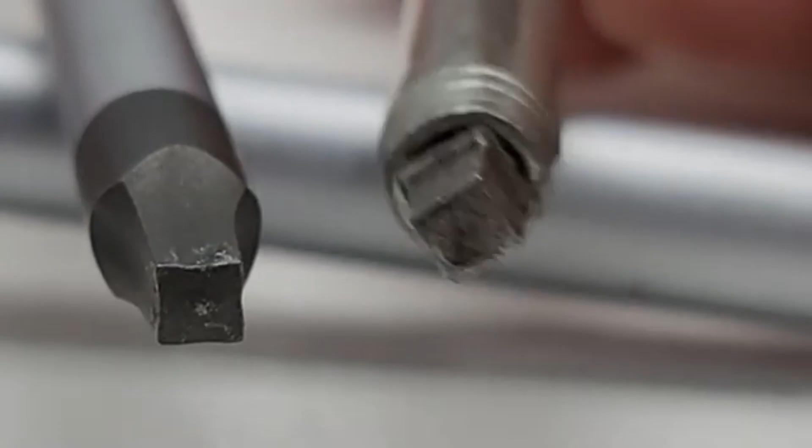In 1913, Henry Ford discovered a tiny piece of Canadian steel that was about to change the speed of global manufacturing. It was a cold-formed, square-drive fastener manufactured in a small brick factory in Milton, Ontario. At the time, Ford was building his automotive empire. Every second on the assembly line cost money.

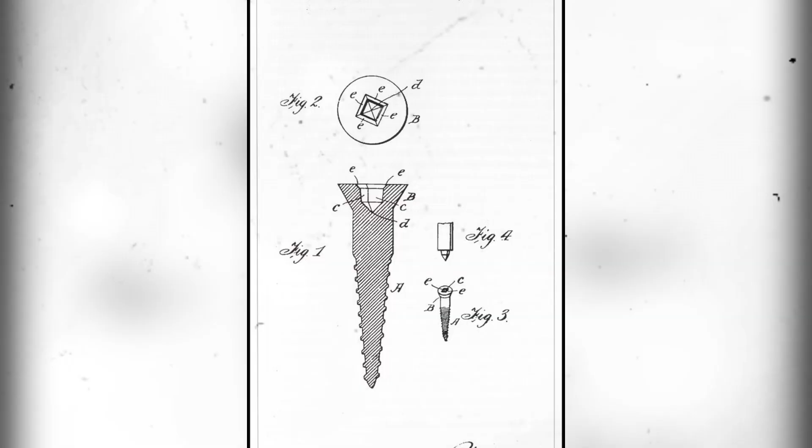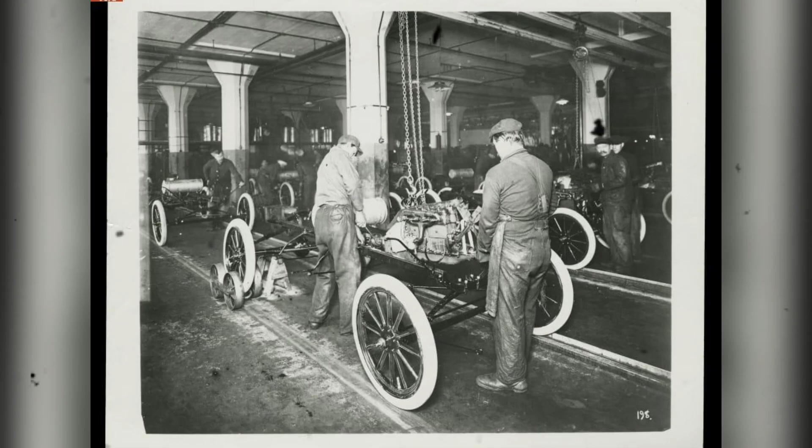When Ford engineers tested this new Canadian screw, they realized the square recess stopped the screwdriver from slipping. It allowed workers to drive screws blind, with one hand, at unprecedented angles. It saved the Ford Motor Company exactly 2 hours of assembly time per vehicle. Ford recognized the mechanical superiority immediately.

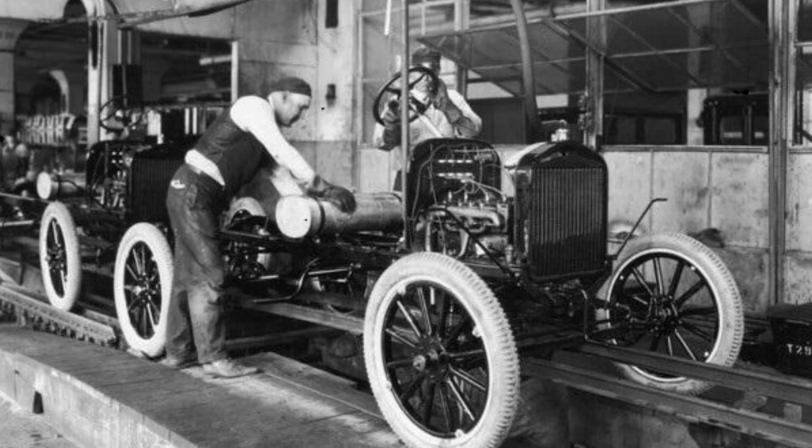He approached the inventor, a former salesman named Peter Lymburner Robertson, with a proposition. Ford wanted the screw. He wanted exclusive rights. He wanted to dictate the manufacturing terms, the licensing, and total control over where the fasteners went.

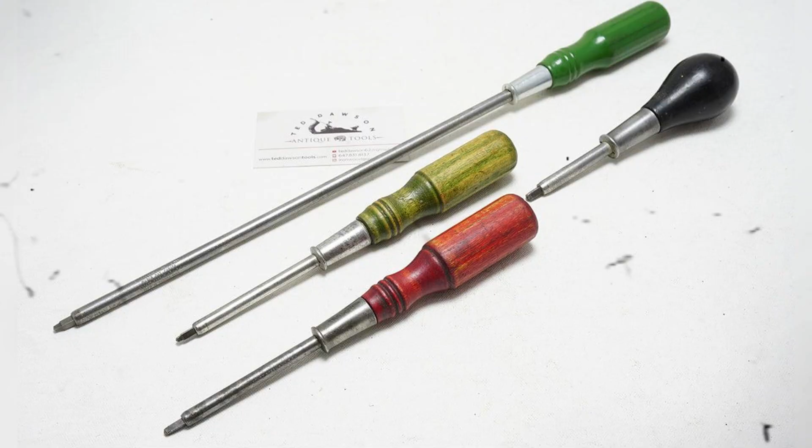Robertson refused. He refused to hand over his patents. He refused to cede control of his Milton factory to American industrial demands. He walked away from the most lucrative manufacturing contract in the history of the early automotive industry. That single refusal fundamentally fractured the North American hardware market. It created a strange, enduring industrial paradox.

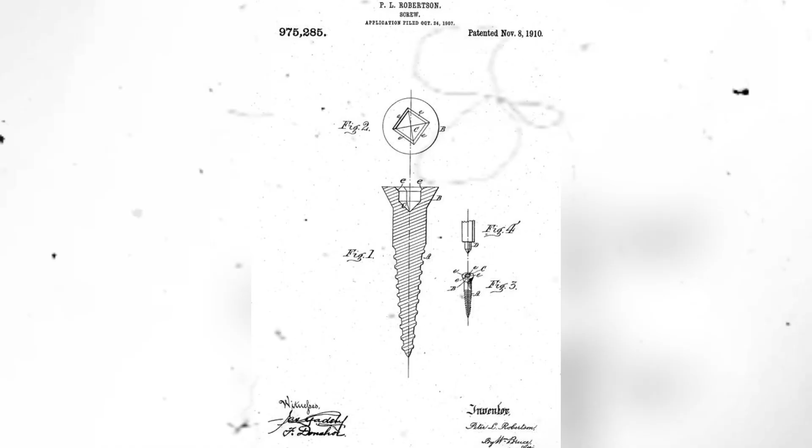To this day, the United States relies heavily on a universally frustrating, cam-out-prone crosshead design. But cross the northern border into Canada, and you will find an entirely different mechanical reality. In Canadian garages, on Canadian construction sites, and inside Canadian manufacturing plants, the Robertson square drive screw achieved absolute dominance. It became the unofficial fastener of an entire nation.

But the cost of that national dominance was international obscurity and the eventual dismantling of the very factory that brought it into existence.

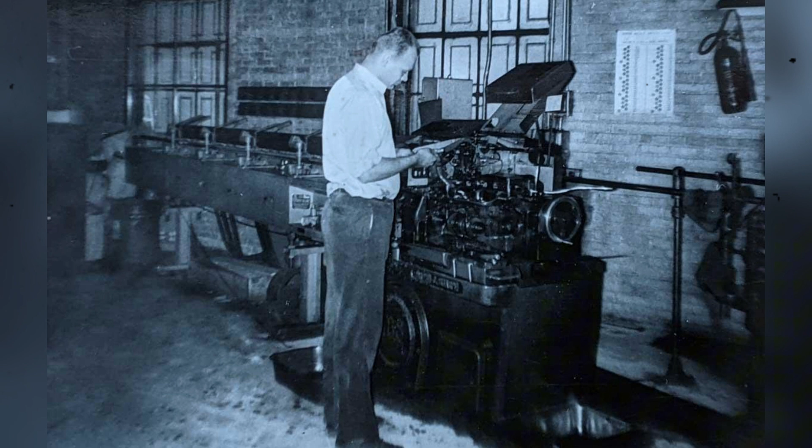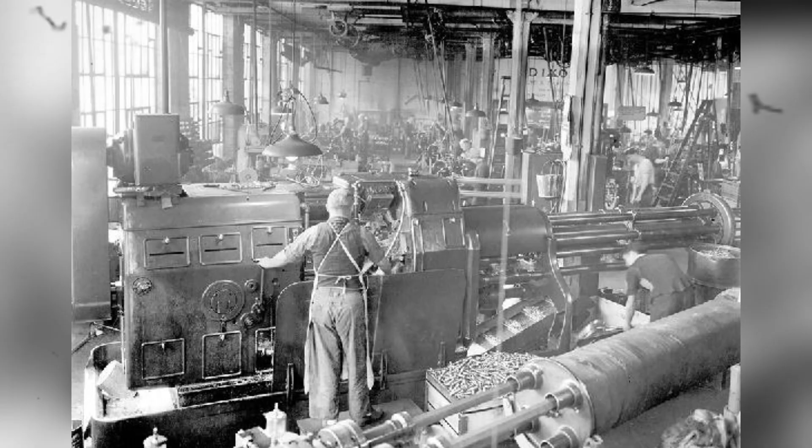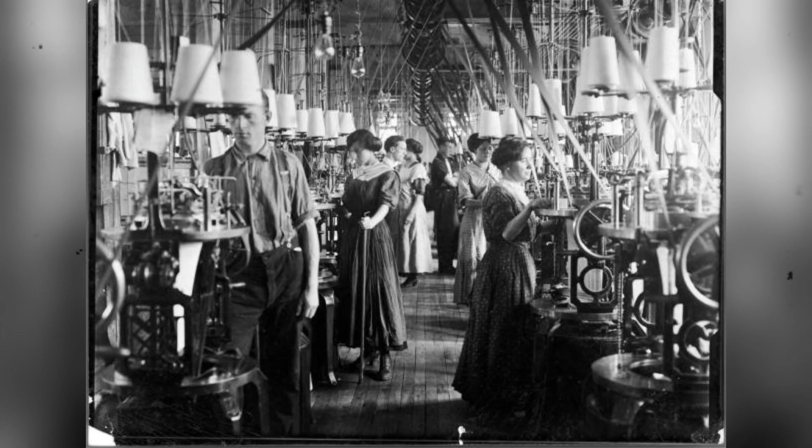Now let us return to the exact moment Peter Robertson realized the shape of the future. The year was 1907. Peter Lymburner Robertson, a traveling salesman born in Seneca Township, Ontario, was standing in a workshop demonstrating a new spring-loaded screwdriver. He positioned the tool. He applied downward pressure.

Without warning, the flat blade slipped violently from the shallow slot of the screw head. The steel plunged directly into his hand. The cut was deep. The bleeding was immediate. Robertson wrapped his hand, stopped the demonstration, and walked away with a profound mechanical revelation. That single physical wound exposed an industrial bottleneck that was quietly costing North American factories millions of dollars in lost time and damaged goods.

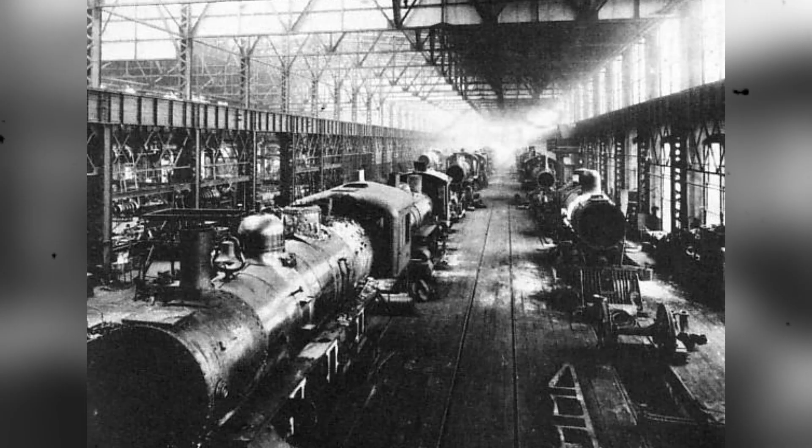Before Robertson filed his patents, the Canadian hardware landscape was entirely dominated by a single, fundamentally flawed fastener, the slotted screw. By the early 20th century, Canadian manufacturing was accelerating. Foundries in Hamilton were pouring steel. Furniture makers in southern Ontario were turning out thousands of chairs and cabinets. Boat builders in the Maritimes were assembling vessels at a rapid pace. Yet the entire industrial apparatus was held together by a screw design that had not changed since the 15th century.

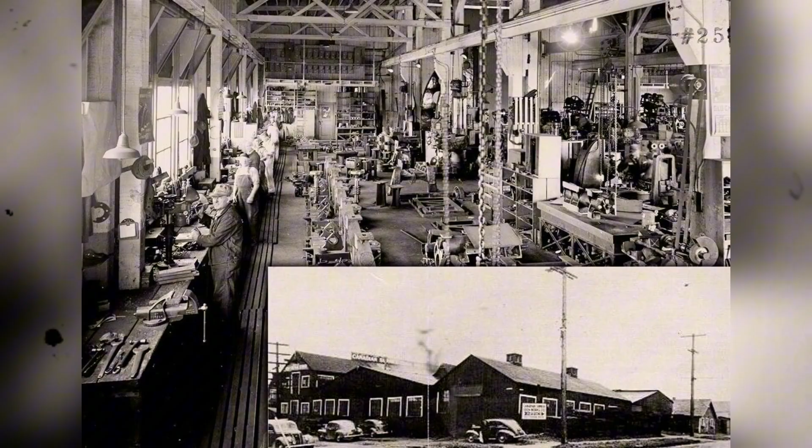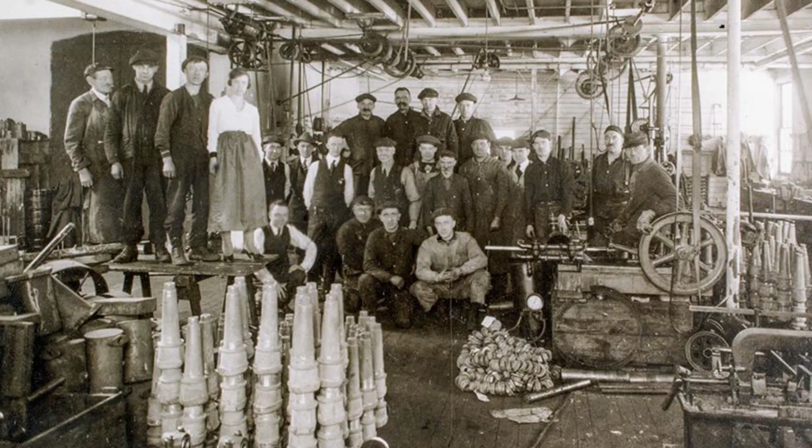The slotted screw, or flathead, was cheap to manufacture because a simple saw could cut the groove. But mechanically, it was an absolute failure for high-speed assembly. It required two hands to drive, one to hold the fastener steady and one to turn the driver. The driver blade had no self-centering capability. If a mechanic applied too much torque, the blade cammed out. If a carpenter drove the screw too fast, the flathead stripped.

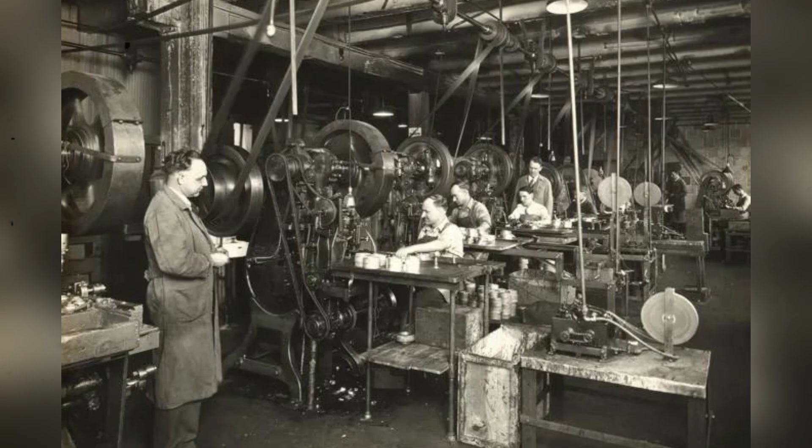When the blade slipped, it invariably gouged expensive mahogany, scratched finished metal panels, or, as Robertson knew firsthand, injured the worker. The slotted screw dictated the speed of Canadian industry, and that speed was slow. Robertson understood that a square recess provided superior torque transfer. The straight walls of a square hole would trap the driver blade, eliminating side slip entirely.

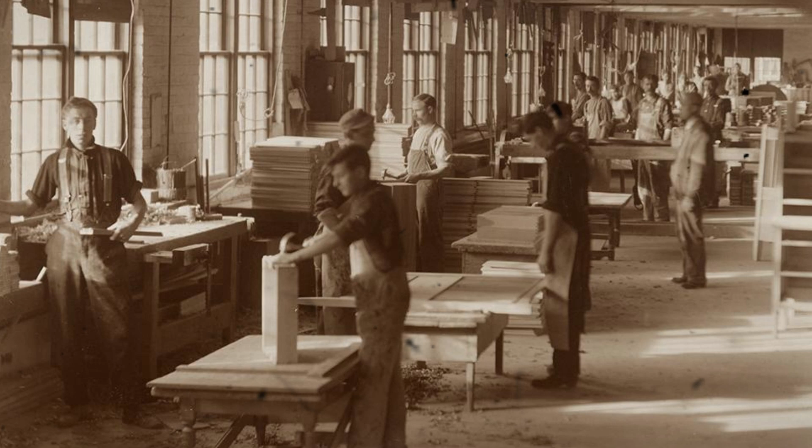But the concept of an internal drive screw was not actually new. Inventors had drawn square drive screws for decades. The problem was not the geometry. The problem was the metallurgy. The engineering hurdle was manufacturing. To mass produce a screw, factories used a process called cold heading. A machine slammed a steel punch into a cold wire blank to form the head.

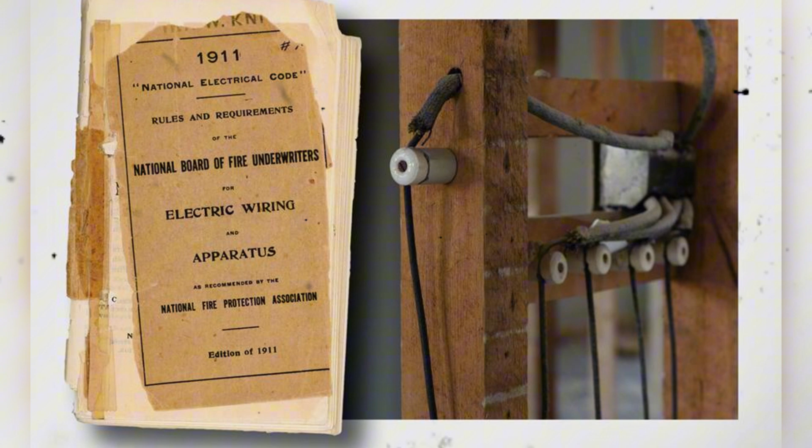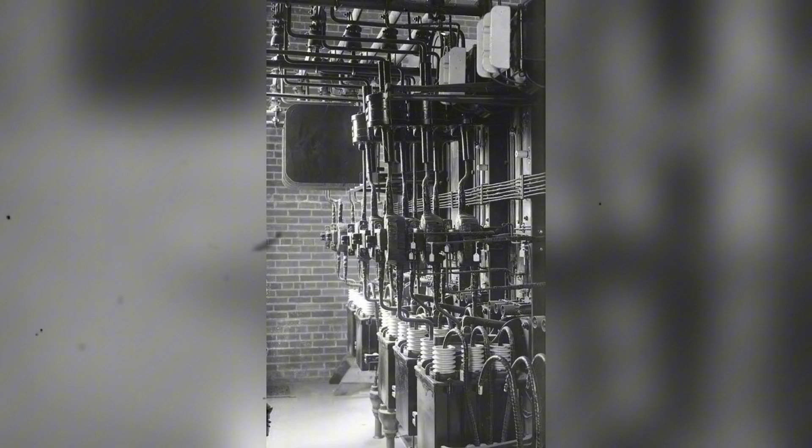If an inventor tried to punch a deep square hole into cold steel, the immense pressure caused the metal to fracture, or the punch would snap upon withdrawal. Because of this manufacturing impossibility, the square drive screw remained an expensive, custom-machined novelty. It was useless to the massive factories springing up across Canada. Robertson solved the metallurgy problem with a subtle geometric trick. He did not punch a perfect square, he punched a tapered square.

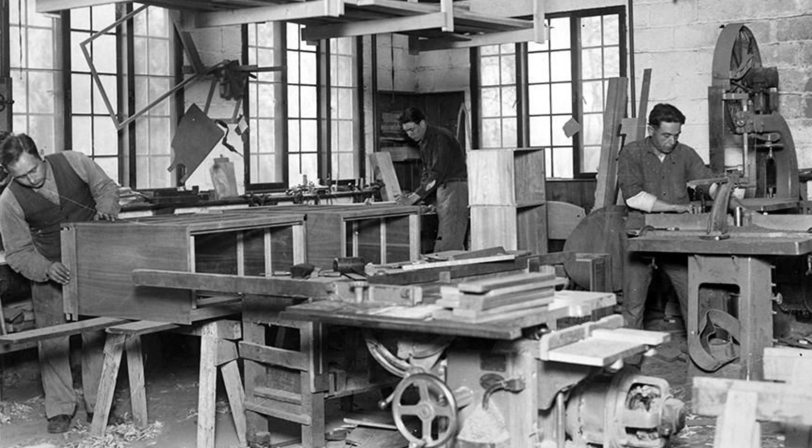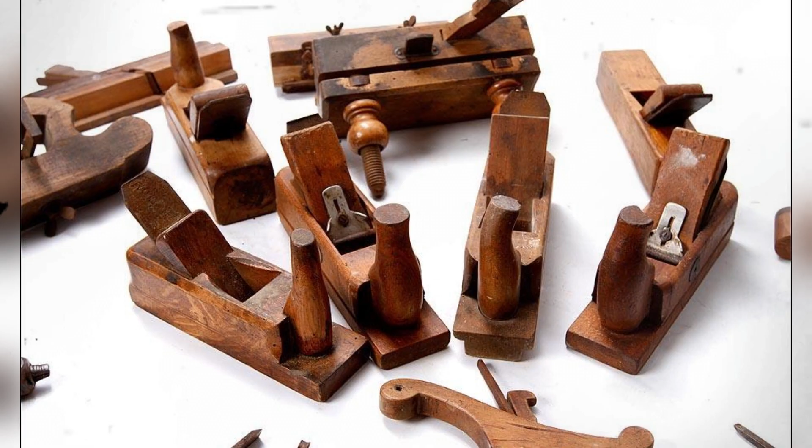By adding a slight chamfer to the corners and a taper to the inner walls of the recess, the cold-heading punch could strike the steel blank and withdraw smoothly without breaking. The taper prevented the steel from fracturing, but it also created an accidental, brilliant side effect. The tapered walls meant that when a matching screwdriver was inserted, the friction wedged the tool and the screw together.

A worker could place a screw on the tip of the driver, hold it horizontally, or even point it straight down, and the screw would not fall off. It was a friction fit. For the first time in mechanical history, a screw could be driven entirely blind, with one hand.

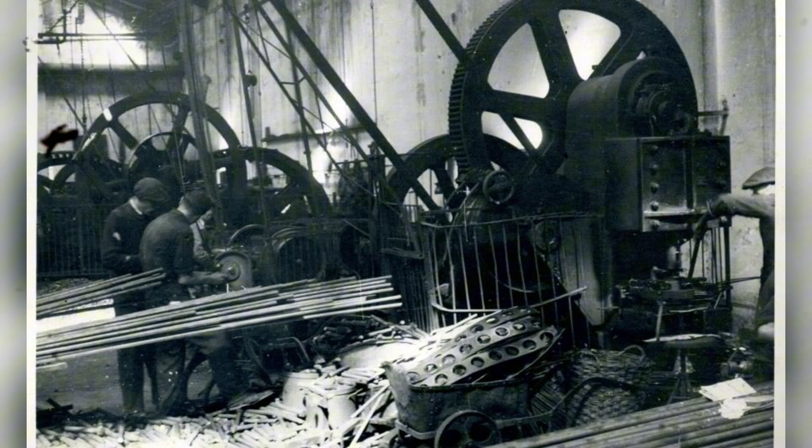In 1908, armed with his patented cold-forming technique, Robertson established the P.L. Robertson Manufacturing Company. He chose Milton, Ontario, a small town west of Toronto. Milton offered crucial advantages: proximity to the expanding industrial centers of Ontario, favorable tax conditions, and direct access to railway lines that could distribute heavy kegs of steel fasteners across the country.

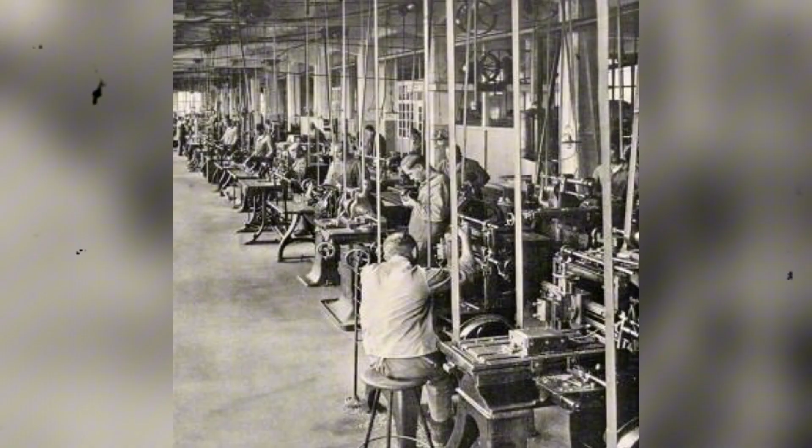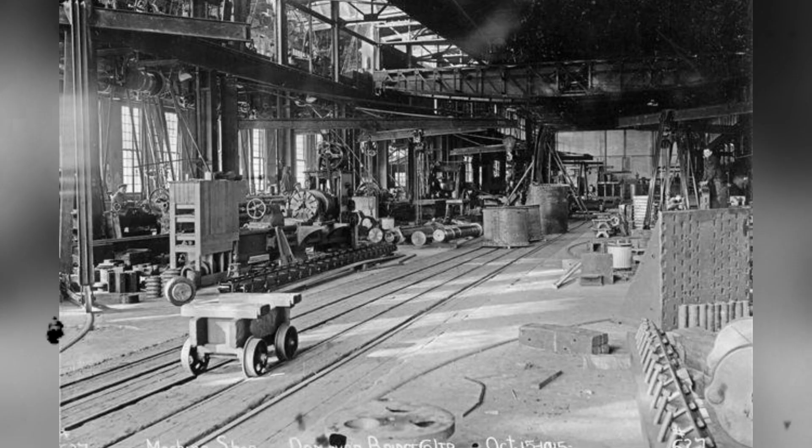The early reception in the Canadian market was a mixture of deep skepticism and sudden, absolute conversion. Local hardware stores in Ontario initially resisted. The Robertson screw required the purchase of a new, specialized screwdriver, an irritating barrier to entry for mechanics who already owned standard flathead drivers. But the first industrial buyers quickly realized the economics of the taper.

When a cabinet-making shop in Toronto tested the first commercial batches from the Milton factory, the results were undeniable. Workers no longer needed to pre-drill pilot holes with absolute precision. They did not have to stop to inspect gouged wood. The Milton factory produced a fastener that allowed carpenters to sink screws twice as fast. Word spread through the Canadian trades.

Electricians discovered they could drive Robertson screws into tight junction boxes with one hand, holding a wire with the other. Plumbers used them in cramped crawl spaces where a slipping slotted driver would mean bruised knuckles. Within 2 years, the P.L. Robertson Manufacturing Company was pulling in orders faster than the cold-heading machines could punch them out.

The Milton factory began expanding. The local workforce swelled. The square drive screw was no longer just an Ontario invention. It was rapidly becoming the foundation of Canadian assembly lines. It represented a distinct departure from traditional toolmaking. It was a precise, unyielding piece of geometry that perfectly suited the cold, pragmatic demands of industrial production.

The Canadian tool market had found its perfect fastener, but the true test of the Milton factory would not come from local carpenters or hardware store clerks. It would come from the most ruthless manufacturing environment on Earth, the emerging automotive assembly line.

To understand why a simple fastener conquered the Canadian industrial landscape, you have to examine the physical geometry of the tool itself. The Robertson screw was not merely a square hole punched into a metal head. It was a highly engineered, truncated pyramid. The 4 internal walls sloped slightly inward, tapering to a flat bottom. This specific taper was the core technological breakthrough. It provided absolute mechanical certainty.

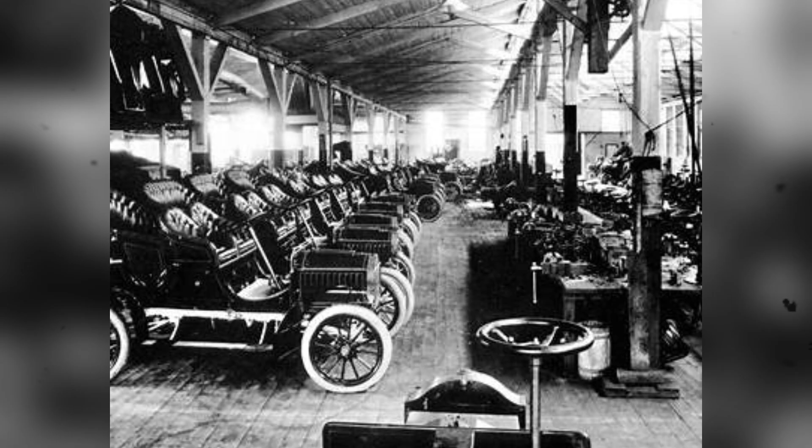When a worker inserted a Robertson screwdriver into the screw head, the tapered tip wedged tightly against the tapered walls of the recess. This created a friction fit, a temporary mechanical bond between the tool and the fastener. The worker could place the screw on the end of the driver and suspend it in midair. It would not fall. More importantly, the square recess entirely eliminated a destructive physical phenomenon known as cam-out.

Cam-out occurs when the rotational force of a screwdriver pushes the blade up and out of the screw head, causing the tool to slip. Slotted screws required constant, heavy downward pressure to prevent cam-out. The Robertson square drive required almost none. The rotational force was captured perfectly by the straight sides of the square.

In the early 1910s, this geometric advantage collided with the birth of modern mass production. The defining testing ground was not a small woodworking shop, but the sprawling industrial floors of the automotive industry. Ford Motor Company had established a major manufacturing plant in Walkerville, Ontario, right across the river from Detroit. The Walkerville plant was tasked with assembling the Model T for the Canadian market and the broader British Empire.

Automobile manufacturing in this era relied heavily on wood. The frames, the interior paneling, and the structural supports were secured by thousands of individual wood screws. Using slotted screws on a moving assembly line was a slow, hazardous process. Workers constantly stripped the screw heads, requiring them to stop, extract the damaged fastener, and start over. If a flathead driver slipped, it gouged the finished wooden panels, resulting in expensive scrap materials.

When the Walkerville Ford plant procured its first bulk orders of Milton-made Robertson screws, the assembly metrics changed overnight. Because of the friction fit, a Canadian assembly line worker could reach into a canvas apron, place a Robertson screw on the tip of his driver, and drive it straight into a wooden chassis frame with one hand. He could drive screws horizontally, vertically, or entirely blind in the dark recesses under the vehicle dashboard. There was no slipping. There was no cam out. The driver stayed locked in the recess until the screw was fully seated.

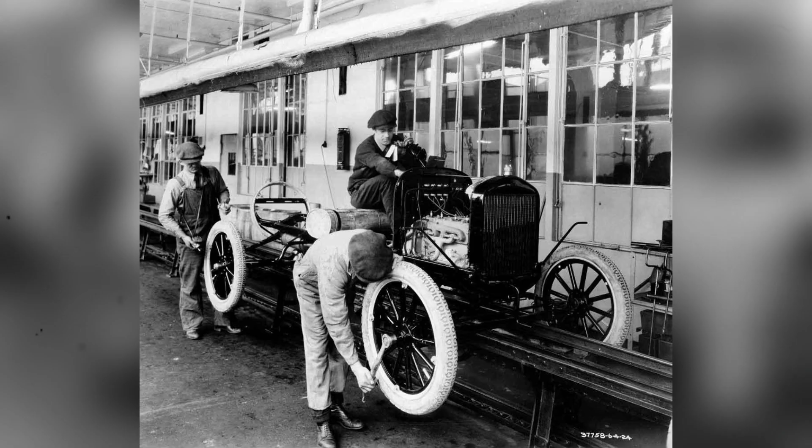Internal efficiency reports from the Walkerville plant revealed a staggering number. By switching from traditional slotted screws to Robertson square drive screws, the Canadian factory saved exactly 2 hours of assembly time per vehicle. In the high-volume, low-margin world of automotive manufacturing, 2 hours of labor savings per unit was an unprecedented economic triumph. The initial unit cost of a Robertson screw was slightly higher than a slotted screw. The cold-forming process required specialized steel and more precise machinery, but the Canadian price context rendered that initial cost irrelevant. The labor time saved on the factory floor instantly absorbed the higher purchase price.

The Fisher Body Company, a massive automotive coach builder operating a facility in Windsor, Ontario, recognized the same mathematics. They adopted the Robertson screw for their wooden car bodies. Stripped screws and ruined wood panels practically disappeared from their production lines. The breakthrough rapidly expanded beyond the automotive sector. The Canadian Pacific Railway, operating out of the massive Angus shops in Montreal, adopted the square drive screw for the construction of their passenger rail cars. Rail cars endured relentless daily vibration. Slotted screws often could not be driven tight enough to withstand the shaking, and they slowly backed out over time. The Robertson drive allowed railway mechanics to apply maximum torque, securing the wooden interiors firmly against the steel frames.

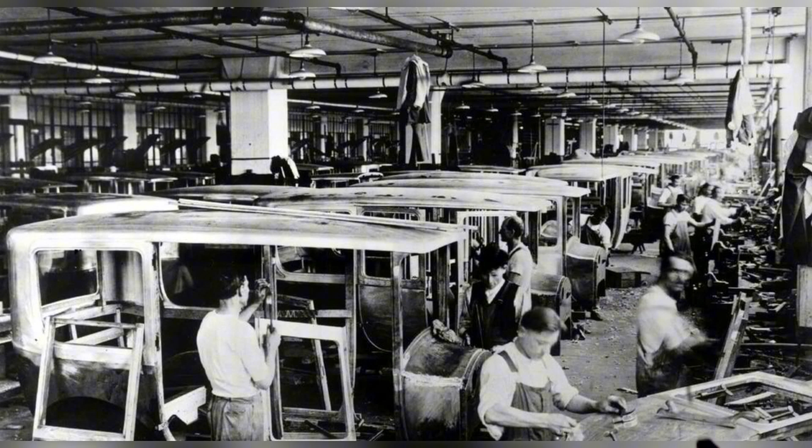In southwestern Ontario, the furniture factories of Stratford abandoned slotted screws in favor of the Milton fasteners. Fine hardwood cabinetry demanded precision. A single slipped flathead driver could destroy a mahogany dresser door. The Robertson screw protected the material, accelerated the cabinet makers, and fundamentally changed the speed of Canadian furniture assembly. Boat builders in the Muskoka region adopted them for marine construction, driving brass Robertson screws deep into wooden hulls where wet hands and tight angles made two-handed fastening impossible. By 1913, the Robertson screw had established a formidable Canadian moat. It was the undisputed standard for high-volume manufacturing across the nation.

This absolute dominance caught the attention of Henry Ford himself. Recognizing the 2 hours of saved assembly time at his Canadian facility, Ford sought to implement the Robertson screw across his entire American manufacturing empire. He requested a meeting with P.L. Robertson. The American industrialist presented a ruthless proposition. Ford wanted to use the square drive screw in his Highland Park plant in Michigan, but he demanded total control. He required the right to manufacture the screws himself in the United States, or he demanded exclusive licensing rights that would effectively turn the Milton operation into a captive subsidiary of the Ford Motor Company.

Robertson refused. He had recently lost European patent rights due to a bad licensing deal in England, and he was fiercely protective of his remaining control. He refused to hand over his manufacturing independence. He refused to let the Ford Motor Company dictate the future of his invention. Robertson walked away from the negotiation table, withdrew from the American automotive market, and returned to his brick factory in Ontario. Henry Ford ordered his American plants to find another solution. The Walkerville plant in Canada continued using the Robertson screw, but the vast, expanding American automotive industry was firmly shut out. This single refusal drew a hard, permanent boundary line.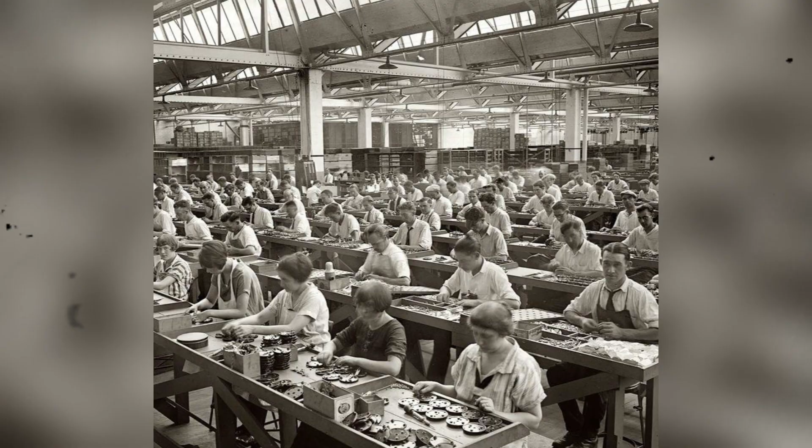It sealed the Robertson screw inside the Canadian market. It was a decision that preserved the independence of the P.L. Robertson Manufacturing Company. It protected the jobs in Milton. It ensured that the square drive screw would become a distinctly Canadian phenomenon. But by locking the American industrial machine out, Robertson unknowingly planted the seeds for his company's eventual systemic isolation.

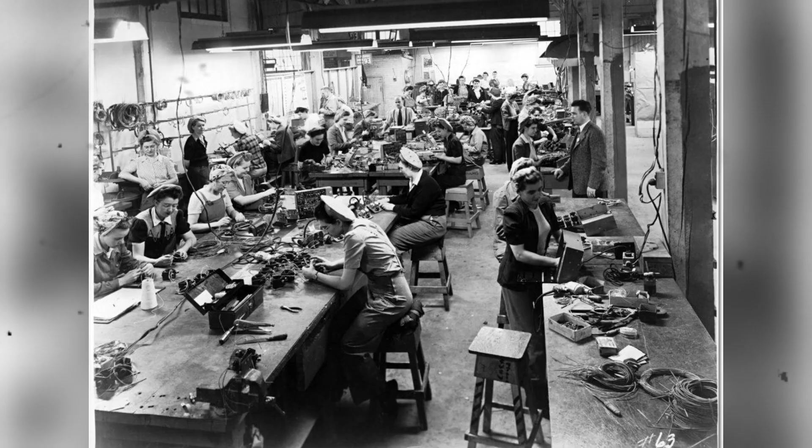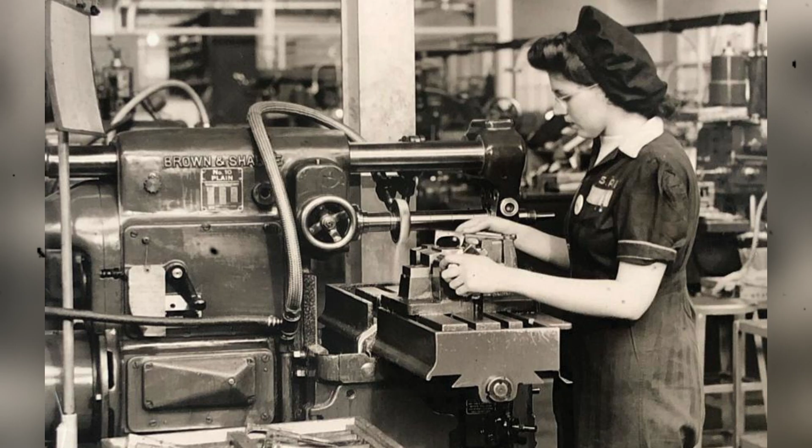By the early 1930s, the P.L. Robertson Manufacturing Company had transformed from a promising local enterprise into the undisputed mechanical heart of Canada. The refusal to surrender to Henry Ford did not destroy Peter Robertson. Instead, the rejection of the American automotive market forced the company to turn inward, conquering every single remaining inch of the Canadian industrial, commercial, and retail landscape. In Milton, the factory expanded into a sprawling, multi-acre brick complex. The rhythmic, deafening thud of massive cold-heading machines echoed across the town 24 hours a day, operating in continuous, unyielding shifts.

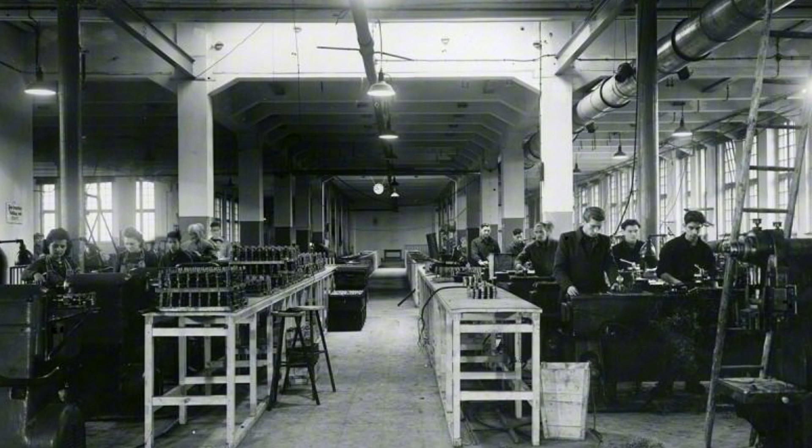Robertson was no longer just a toolmaker. He was the primary economic engine of Milton. The company built houses for its rapidly expanding workforce. It paved the local dirt streets. It funded the construction of the Milton Hospital.

The town and the tool factory were inextricably bound together, operating in absolute synchronization to feed a nation's insatiable demand for the square drive fastener. The scale of production reached staggering, unprecedented metrics. The Milton plant was consuming hundreds of tons of raw steel wire every single week.

Massive spools of steel were fed into the headers, punched, threaded, heat-treated, and poured into heavy wooden kegs. At its peak, the factory was churning out millions of individual screws every day.

Walk into Aikenhead's Hardware in downtown Toronto during the 1940s, and the traditional slotted screw had been relegated to the back shelves, sold mostly to American tourists or for the repair of antique furniture. The prime retail space, the front aisles, and the heavy bulk bins were entirely dominated by the Robertson drive.

In Montreal, Pascal Hardware distributed thousands of kegs of Milton fasteners to Quebec construction crews. Western Canadian retailers, supplied by the sprawling transcontinental railway networks, brought the square drive to the booming prairie cities and the expanding logging camps of British Columbia.

The true glory of the Robertson Empire was its absolute, unquestioned adoption by the Canadian trades. It was a level of market saturation that most global toolmakers could only dream of achieving.

The company introduced a brilliantly simple, color-coded handle system for their screwdrivers that became a permanent part of the Canadian industrial vocabulary. The number 0 driver was yellow, the number 1 was green, the number 2 was red, the number 3 was black. The Canadian electricians standardized entirely on the Robertson. The red-handled number 2 Robertson screwdriver became the mandatory, foundational tool in every electrician's leather pouch.

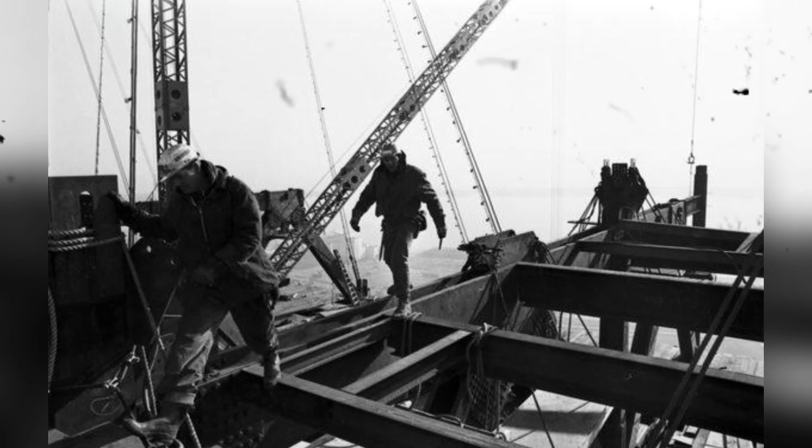You could not wire a commercial building in Toronto, a factory in Vancouver, or a residential home in Halifax without it. Ontario Hydro and Bell Canada mandated the square drive fastener for their massive infrastructure projects. Electrical junction boxes, switch plates, breaker panels, and heavy conduit brackets across the nation were manufactured exclusively with Milton forged screws.

The Canadian carpenter completely abandoned the flathead. During the massive post-war housing boom of the 1950s, framing crews, roofers, and finish carpenters relied heavily on the green-handled number 1 and the red-handled number 2 drivers. When Beaver Lumber supplied the raw materials for hundreds of thousands of new suburban homes across the provinces, the accompanying hardware was stamped in Milton.

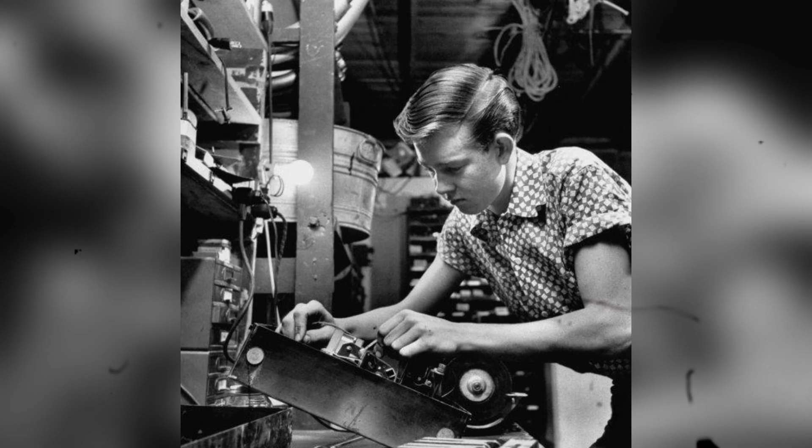Plywood subfloors were screwed down with Robertson drives. Kitchen cabinets were hung with Robertson drives. The Canadian marine industry, operating out of the massive naval shipyards in Halifax, and the specialized recreational boat builders in Ontario's cottage country, drove millions of brass and bronze Robertson screws into wet, unforgiving lumber. The friction fit allowed shipwrights to drive fasteners deep into the hulls while hanging off scaffolding over the water.

The peak Canadian workshop experience was not defined by the roar of a new power saw, but by the silent, perfectly seated friction fit of a red-handled driver locking flawlessly into a Milton forged screw. This was the zenith of the empire. The square drive screw was not just a highly successful commercial product. It was the absolute defining standard of Canadian hardware. It was an unbreakable mechanical monopoly built on superior geometry.

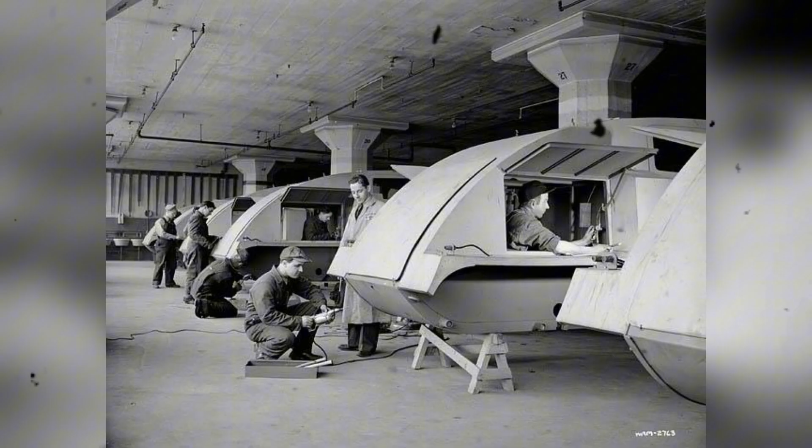But while the Milton factory pumped out millions of fasteners a day to secure the borders of its Canadian kingdom, a different, deeply flawed industrial standard was quietly conquering the rest of the world. The isolation of the Canadian market was absolute.

While the American manufacturing sector grudgingly adopted the Phillips head screw in the 1930s, a design fundamentally engineered to cam out and prevent over-torquing on early, unrefined assembly lines, Canadian industry refused to regress. The Milton factory had already provided a superior solution. The Canadian mechanic did not want a tool designed to fail. They wanted the Robertson. While the American mechanic spent the post-war boom cursing stripped crossheads and drilling out ruined fasteners, the Canadian mechanic worked in rapid, uninterrupted silence.

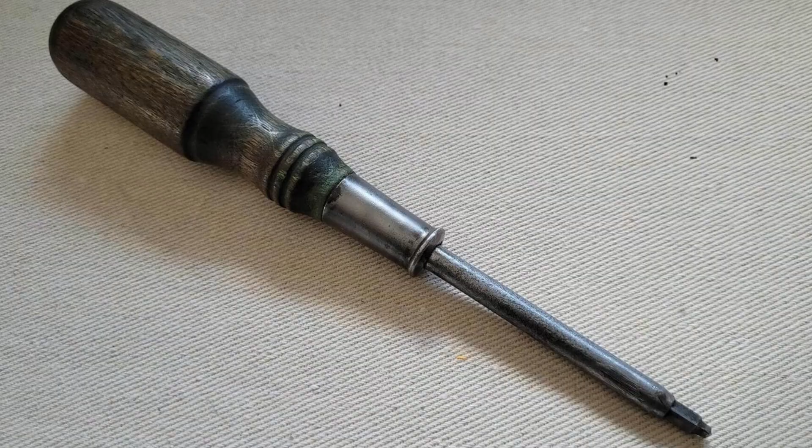Walk down the hardware aisle of an early Canadian Tire store in 1955, and the visual evidence of this victory was overwhelming. Row after row of heavy cardboard boxes, each stamped with the Milton, Ontario manufacturing mark, filled the shelves. The Phillips screw was treated as an unwanted foreign invader, stocked only as a necessary evil for repairing imported American appliances or servicing American cars.

The cultural saturation went deep into the educational system. In the technical schools of Ontario and Quebec, vocational instructors did not even bother teaching students how to drive a slotted screw properly.

It was considered a dead technology. Apprentices were handed a green number 1 and a red number 2 Robertson driver on their first day. The curriculum was standardized around the square drive. The trade unions demanded them. The construction contractors budgeted for them.

The P.L. Robertson Manufacturing Company was not just producing a fastener. It was holding together the entire physical infrastructure of the Canadian mid-century economic boom. If this company faltered, if this factory closed, Canada would lose the one piece of perfect mechanical logic that separated its workshops from the rest of the world. The scale of this dependency was visible in every sector.

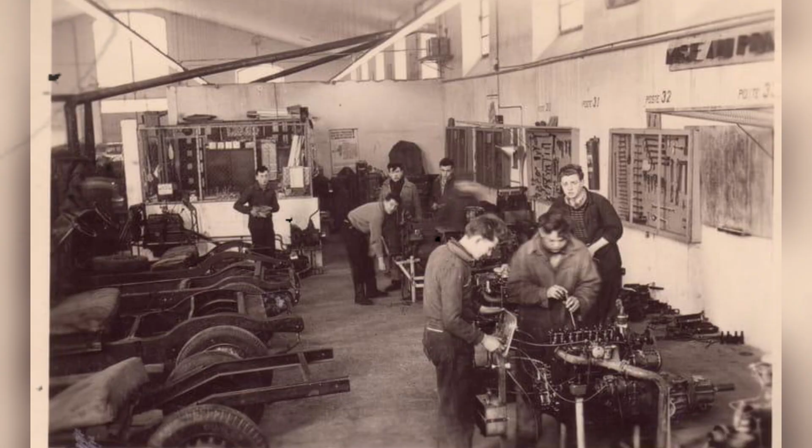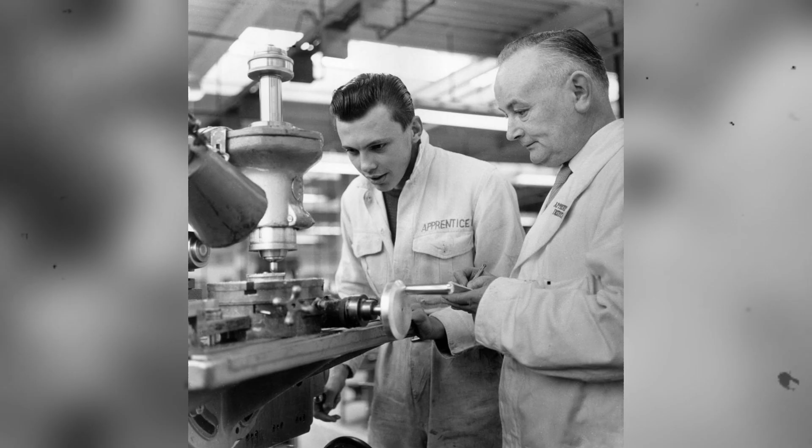The mobile home and trailer manufacturing boom of the early 1950s, centered in small towns across Alberta and Ontario, relied heavily on Robertson fasteners to secure lightweight wood paneling to metal frames. The relentless vibration of a trailer on the newly built Trans-Canada Highway would shake a slotted screw loose within miles. The Robertson, driven tight with its superior torque, held the Canadian road.

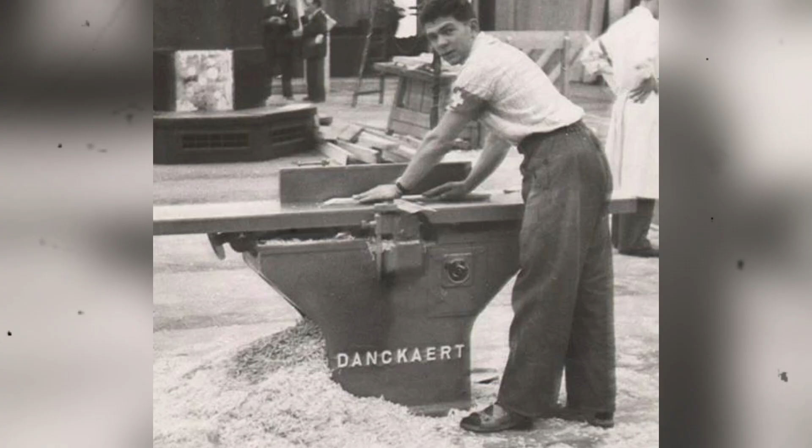Furthermore, the Canadian agricultural sector heavily adopted the square drive. Tractor repair shops in Manitoba stocked Robertson machine screws to replace the stripped factory hardware on imported farm equipment. The square recess meant a farmer could clear a screw head packed with hardened prairie mud using a simple nail, and the driver would still engage perfectly. A Phillips head, once filled with debris, was almost impossible to clear and drive in the field. The Robertson was an all-weather, all-condition fastener.

The Milton factory was running at maximum capacity. The peak metric of this Canadian dominance was almost incomprehensible. By 1950, the plant was producing billions of square drive fasteners annually. It was estimated that over 80% of all wood and machine screws sold in Canada bore the distinct tapered square recess. The Milton facility had grown into a self-sustaining industrial ecosystem. It was an era when the phrase "made in Canada" still represented the absolute pinnacle of hand tool engineering.

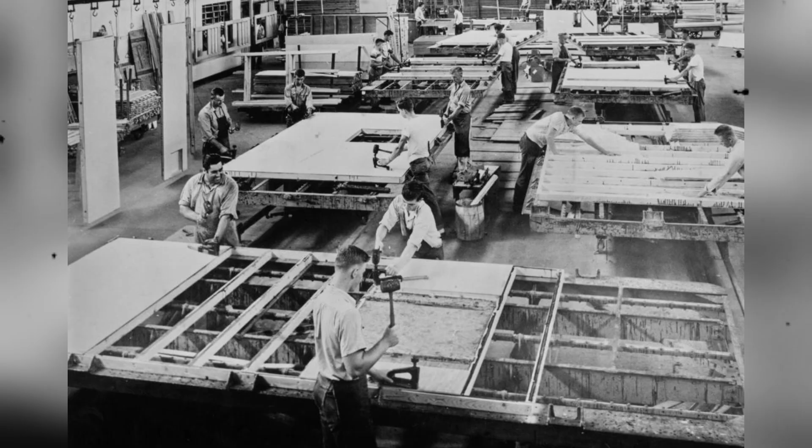The adoption was so total, so culturally ingrained, that a generation of Canadian tradesmen grew up entirely unaware that the Robertson screw was a local anomaly. A carpenter in Calgary simply assumed that when a builder in Chicago or London reached for a screw, they reached for a Robertson. It was the standard. Nothing else made mechanical sense.

But this empire was structurally fragile. The failure to secure the American market with Henry Ford had confined the Robertson screw to a geographical island. P.L. Robertson had built a massive, highly specialized manufacturing machine that relied entirely on the continued loyalty of the Canadian retail and industrial sectors. As long as Robertson was alive, and as long as the Canadian borders remained somewhat protected by trade tariffs and logistical distance, the Milton factory was a fortress.

However, the forces of international toolmaking were shifting. The original patents that had protected the precise taper of the Robertson square drive had expired. Giant American hardware corporations were looking north, eyeing the lucrative Canadian retail shelves. They possessed massive economies of scale, producing inferior screws at a fraction of the cost. And inside the red brick walls of the Milton plant, time was running out for the uncompromising founder.

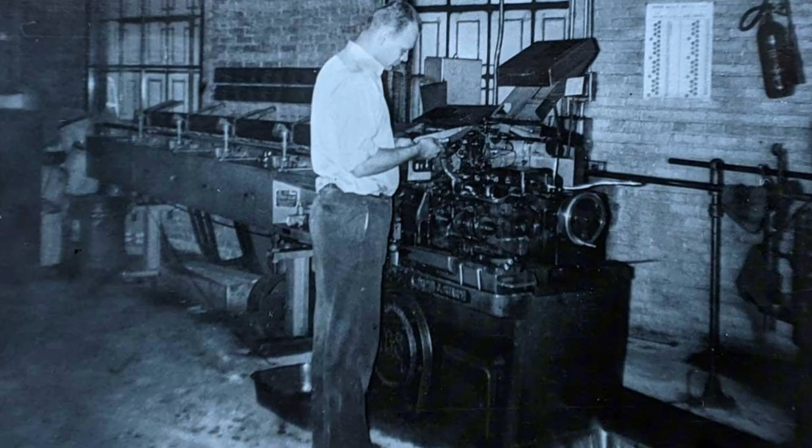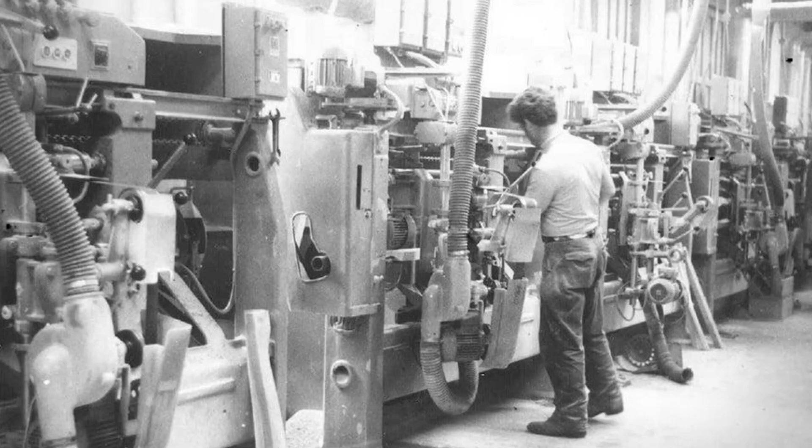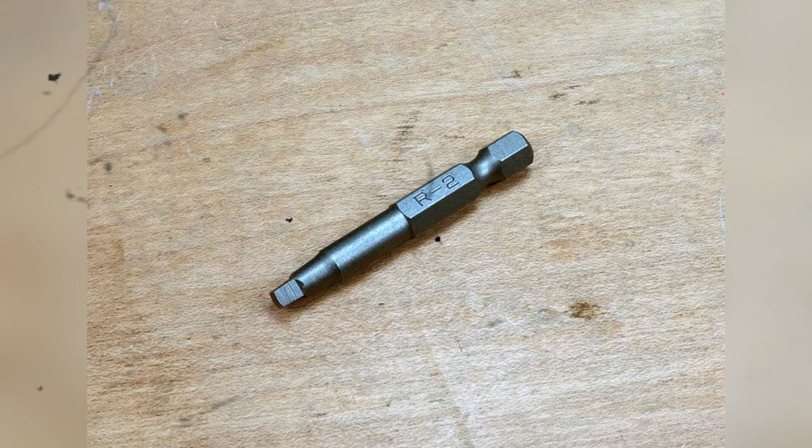In 1951, Peter Lymburner Robertson died at the age of 72. He left behind a thriving industrial town, a universally beloved tool, and a fiercely independent company. But without his absolute stubborn control, the fortress doors were suddenly unlocked. The golden era of the Canadian toolmaking empire had reached its absolute summit. The long, slow, systematic dismantling of the Milton plant was about to begin.

In 1951, Peter Lymburner Robertson died at the age of 72. His death was not merely the loss of an inventor, it was the collapse of the most formidable defensive wall surrounding the Milton factory. For over 4 decades, Robertson had governed his company with absolute, uncompromising control. He had refused Henry Ford. He had rejected Wall Street investors. He had denied any engineering concessions that would trade mechanical perfection for short-term profit.

But when he died, the sheer force of his stubborn independence vanished. The wealth and control of the company transferred, and the boardroom doors swung open to the very financial forces Robertson had spent his life fighting. The decline of the Canadian square drive empire was not a sudden, fiery collapse. It was a slow, systematic erosion driven by patent expirations, corporate absorption, and the ruthless math of modern retail.

In the 1960s, the core patents protecting the precise, tapered geometry of the Robertson recess expired. The perfect mechanical design, which had granted Milton an untouchable monopoly in the Canadian tool market, suddenly became public domain. The legal barrier was gone.

Any steel plant in Ohio, any cold-heading facility in Asia, and any multinational corporation had the legal right to manufacture square drive screws. But instead of triggering a war over engineering quality, the market initiated a ruthless race to the bottom in price.

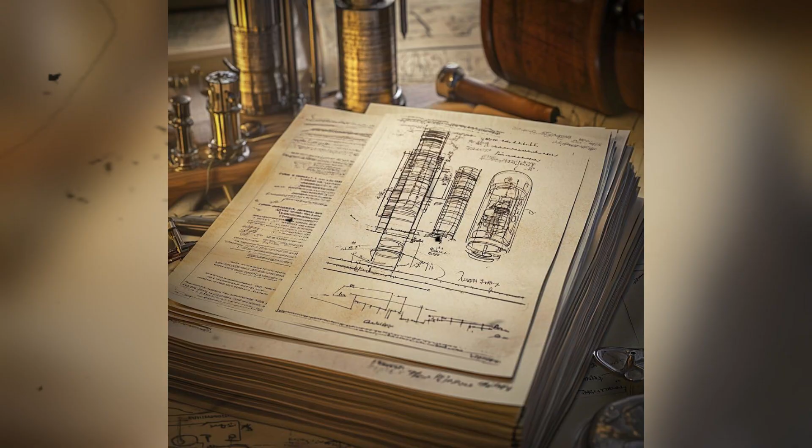This corporate absorption collided with a massive structural shift in hardware retail. Throughout the first half of the 20th century, Robertson's distribution relied on independent hardware stores, regional industrial suppliers, and the Canadian railway network. But moving into the 1970s and 1980s, the rise of massive big-box retail chains shattered that traditional structure. The big-box stores changed the rules. They controlled the aisles, they controlled the shelf space, and most importantly, they demanded catastrophic reductions in wholesale pricing.

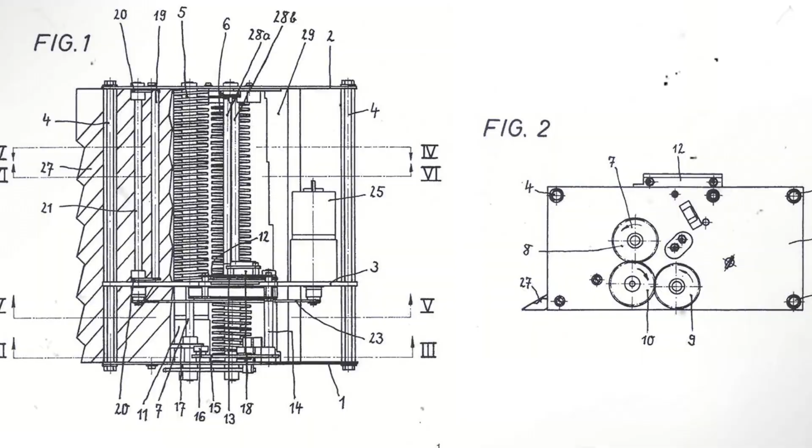These retail giants quickly realized a harsh mathematical truth. With the patents expired, they were no longer obligated to buy genuine Milton-stamped boxes. Instead, they began sourcing private label hardware from overseas. A flood of cheap imported square drive screws hit the Canadian market. This influx of foreign hardware dealt a devastating blow to the Milton plant. The imported fasteners were cheaper because they used inferior steel alloys and were produced by cheap labor.

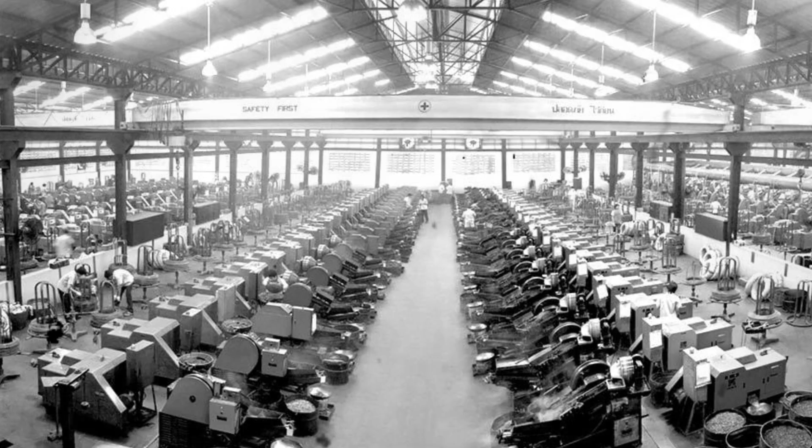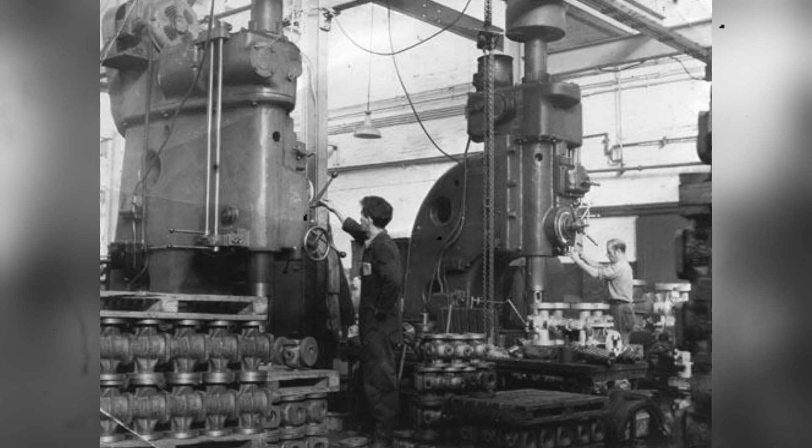More importantly, to save time during the cold-forming process, foreign manufacturers often skipped the delicate, differential taper inside the square recess, the exact geometric detail that created the perfect friction fit. But to the purchasing managers at the big box chains, this loss of mechanical grip was irrelevant compared to the massive profit margins. When a construction contractor bought hundreds of thousands of screws for a housing project in suburban Toronto, a few dollars saved per keg instantly decided the contract.

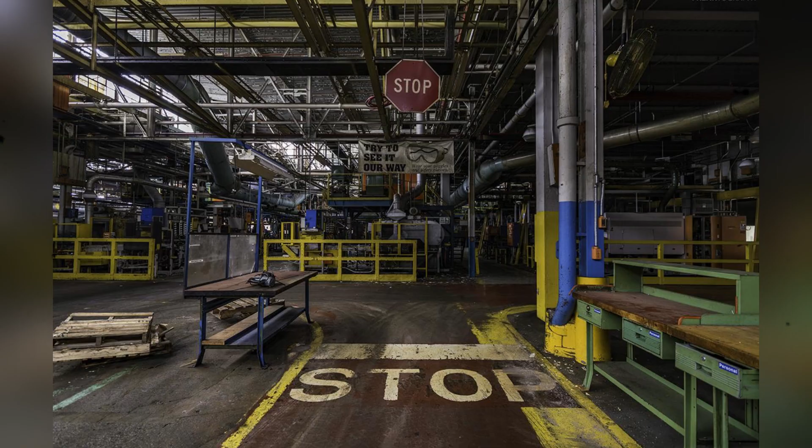This competitive displacement did more than erode revenue. It eroded the mechanical truth of the tool. Millions of Canadian carpenters, electricians, and mechanics began driving cheap, imported square drive screws, and they noticed the drivers slipping, the corners rounding, and the fasteners failing to hold. They did not know they were using a flawed copy. They just saw a square hole and assumed the quality of Robertson had collapsed. The ultimate symbol of Canadian mechanical perfection was being diluted by its own shape.

As contracts were canceled and orders dropped, the once glorious factory began to shrink. The relentless noise of the cold-heading machines was replaced by long periods of silence. Night shifts were canceled. Veteran machinists were laid off. The company acted according to basic survival logic. They sold off assets, they cut costs, and they compromised. But the retreat of the Canadian tool-making empire was only just beginning.

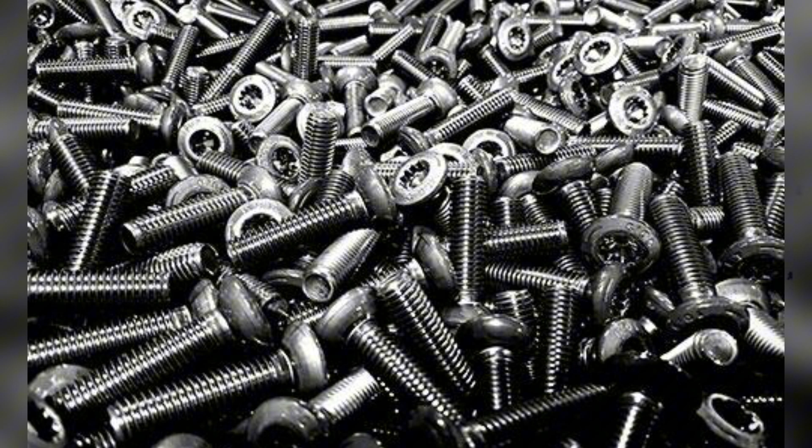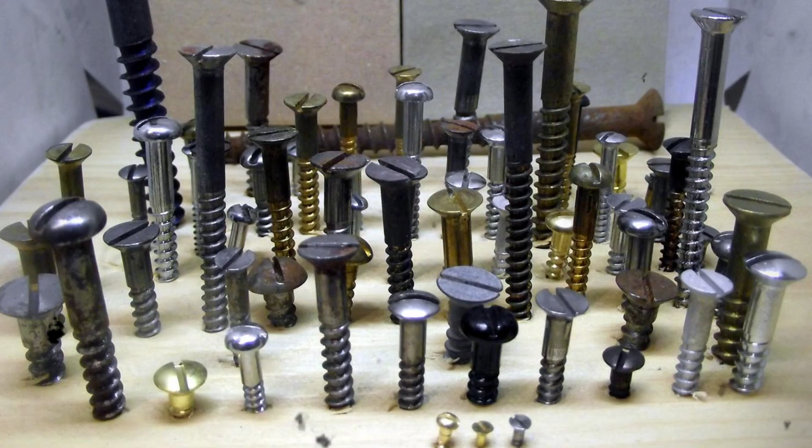As the 1980s gave way to the 1990s, the North American Free Trade Agreement fundamentally altered the Canadian industrial landscape. The border that had once protected Milton became highly porous. Tariffs vanished almost overnight. Multinational hardware corporations saw the Canadian market not as a separate, respected ecosystem, but as a minor northern territory to be flooded with globalized supply chains.

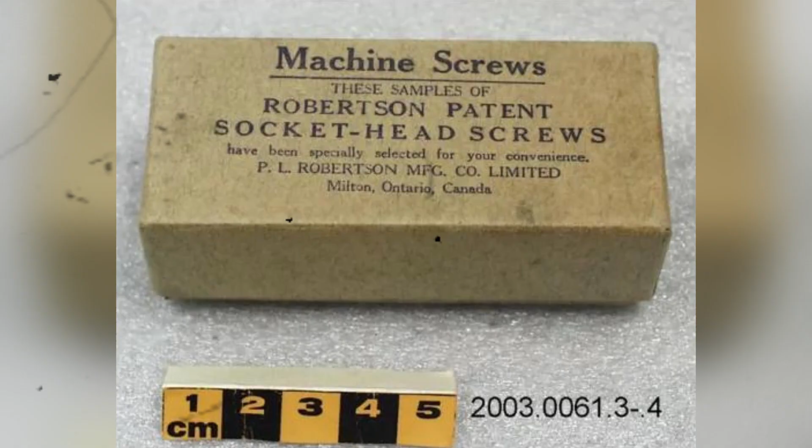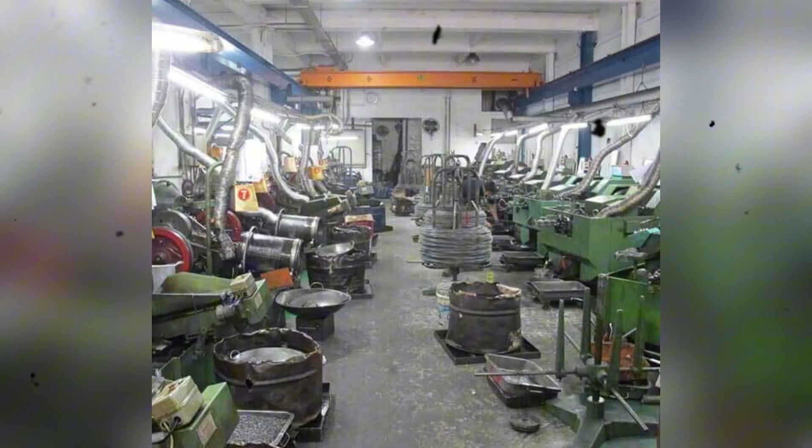Furthermore, the environmental regulations surrounding the heat treating and metal plating processes were tightening across the province. These regulations required millions of dollars in facility upgrades, capital investments that the parent companies simply refused to authorize for an old factory. In contrast, massive manufacturing hubs in Taiwan and mainland China offered cold heading and heat treating at a fraction of the cost. The harsh mathematical reality of globalism left absolutely no room for a localized, highly specialized Canadian tool plant. The parent corporations initiated a systematic, irreversible process of outsourcing the production of the very fastener that had built the town. It happened in stages, almost invisibly at first.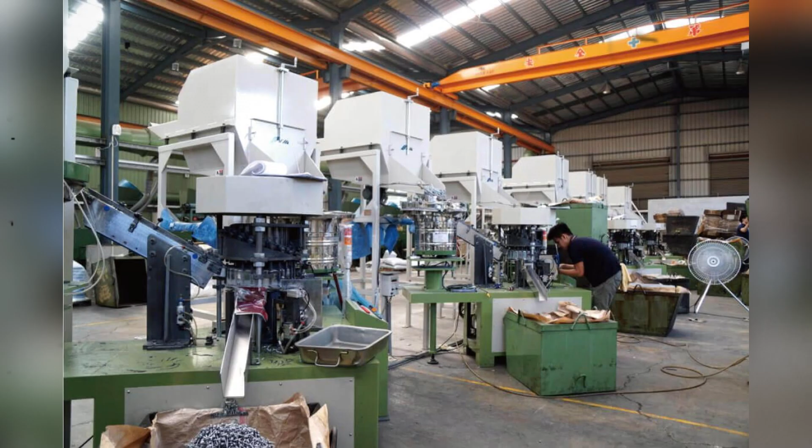The factory began importing raw steel blanks from overseas and only threading them in Milton. Then they outsourced the specialized low-volume fasteners entirely. Finally, the massive high-volume orders for standard residential construction screws were shifted to Asian contractors. Even the iconic color-coded screwdrivers themselves, the legendary green number 1 and the red number 2, were quietly outsourced.

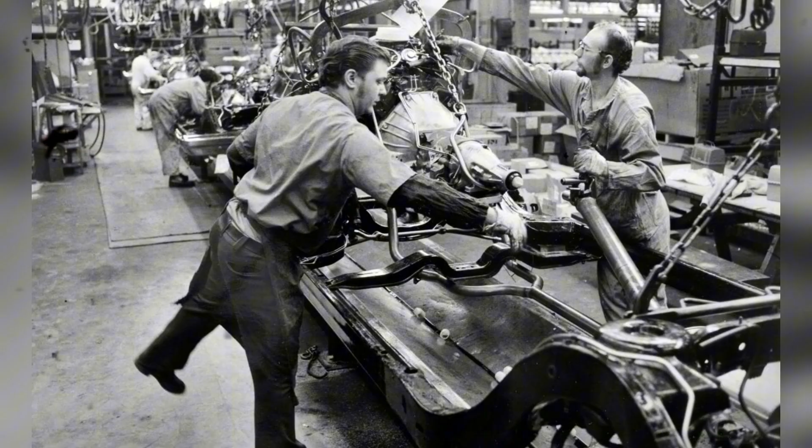The Made in Canada stamp, a physical mark of mechanical guarantee that had defined the tool for 80 years, was quietly erased from the stamped handles. This systemic shift was painfully visible in every Canadian Tire, Home Hardware, and local lumber yard across the nation. The heavy cardboard kegs proudly stamped with Milton, Ontario, vanished from the retail aisles. They were systematically replaced by sleek plastic tubs, imported blister packs, and generic cardboard boxes.

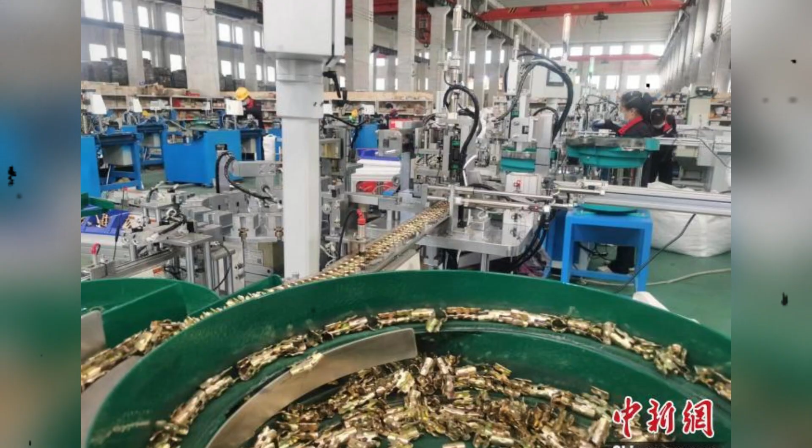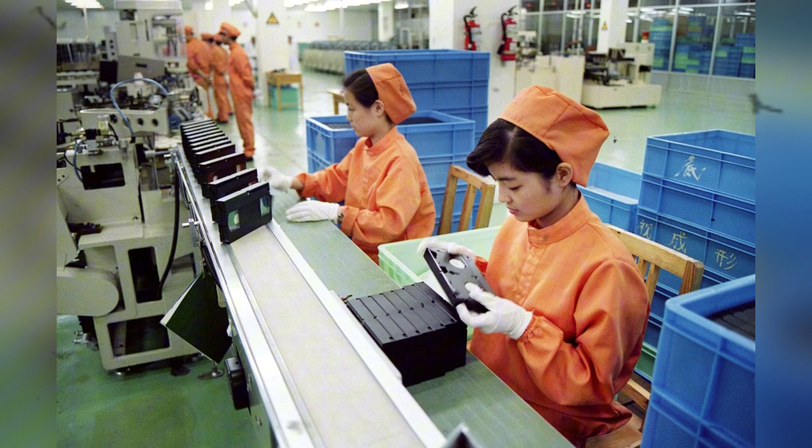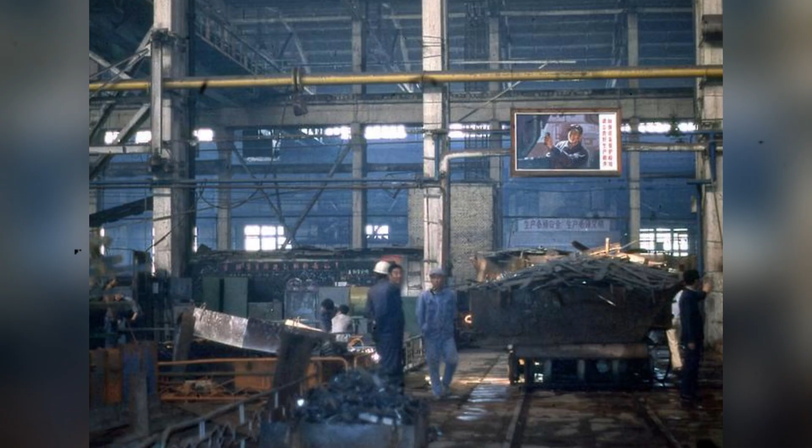The red-handled number 2 driver, the definitive, mandatory tool of the Canadian electrician, lost its substantial, heavy feel. The new plastic handles were injection molded overseas. The steel tips, while still square, lacked the absolute perfect friction fit of the original Milton cold heading process. The mechanics noticed it immediately. The carpenters felt it in their hands. The imported tool slipped just a fraction of a millimeter more. The grip was slightly less certain.

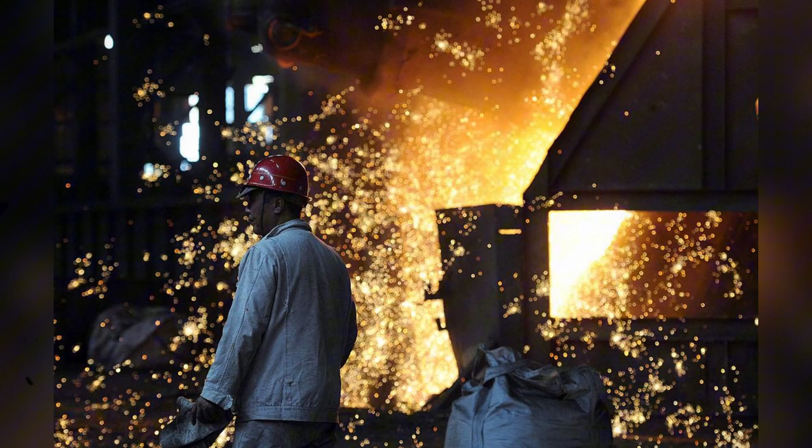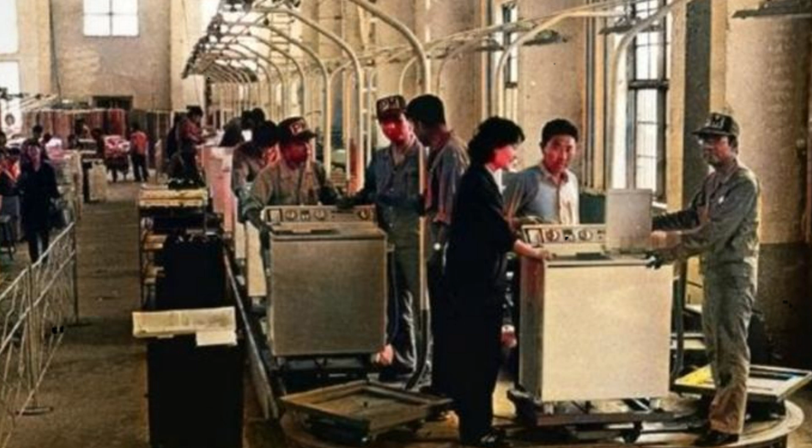When a framer in British Columbia tried to drive one of these new imported screws into dense Douglas fir, the square recess would frequently strip. The imported fasteners lacked the exact differential taper that P.L. Robertson had spent years perfecting. Foreign factories simply punched a straight square hole to save machining time, ignoring the slight, brilliant angle of the inner walls. Without that specific taper, the friction fit was completely destroyed.

The screw would fall off the tip of the driver. The worker needed 2 hands again. The fundamental defining advantage of the Robertson system was being erased by cheap manufacturing practices. Yet because the imported box still said square drive, the user blamed the concept, not the execution. The executives in Chicago and overseas did not care about a frustrated framer in British Columbia. They cared entirely about the unit cost. By stripping the manufacturing out of Canada, they maximized the profit margins on a legacy brand.

The P.L. Robertson Manufacturing Company had been reduced from an innovative engineering pioneer into a hollow distribution shell. They were simply importing metal from Asia, packaging it in a box with a Canadian heritage logo, and selling it to big box retailers. Inside the Milton plant, the corporate dismantling was clinical and entirely devoid of sentiment. The original patents were long dead. The Canadian manufacturing moat was utterly breached. The brand name Robertson survived, but it survived merely as a licensed trademark. The tool company was no longer shaping Canadian industry. It was just a ghost haunting the hardware aisle.

The town of Milton, which had grown entirely around the brick walls and the deafening rhythm of P.L. Robertson's vision, was rapidly transforming into a quiet commuter suburb of Toronto. The industrial identity was actively erased. The massive railway spurs that once carried millions of square drive fasteners to the prairies and the Maritimes were paved over, replaced by residential developments and sprawling shopping centers.

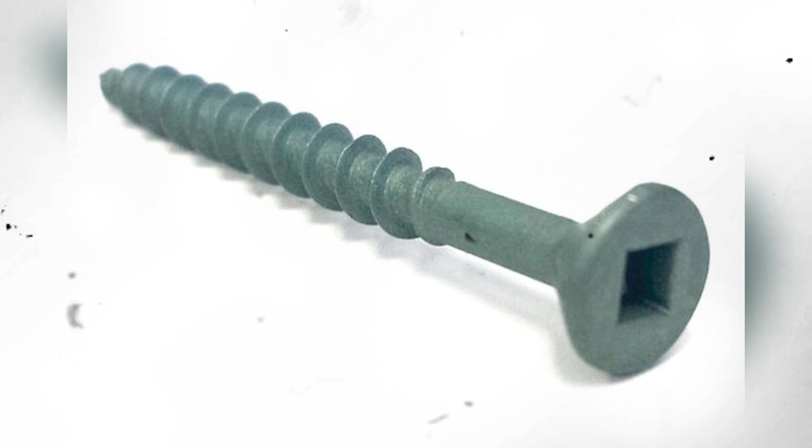The vital business decisions are made far from the quiet streets of Milton. The raw steel is no longer poured in Hamilton foundries. The cold heading process, the precise machining of the tapered recess, and the final stamping of the hardware are largely executed by anonymous contractors in massive, overseas industrial zones. The economic empire that Peter Lymburner Robertson built to protect his invention has been entirely dismantled, stripped down, and fed into the ruthless efficiency of the global supply chain. Yet the mechanical logic of his invention refused to die. In an unprecedented defiance of corporate absorption and global retail standardization, the Robertson screw survived.

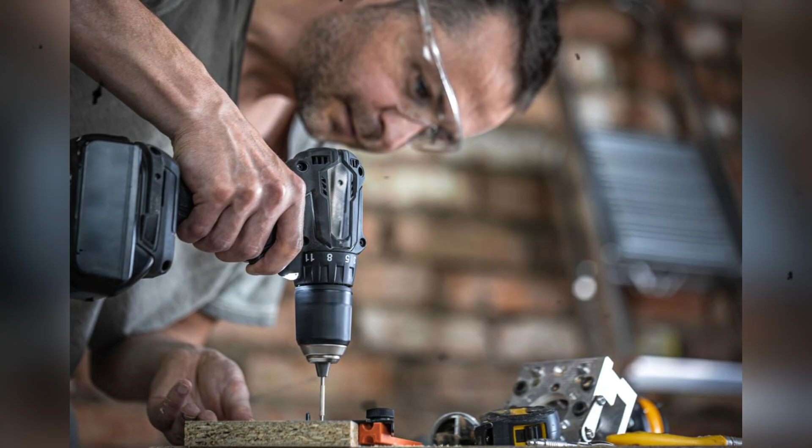It did not merely survive as a niche specialty item, it survived as the absolute, unquestioned, permanent mechanical standard of an entire nation. Cross the border into the United States today, and the square drive fastener remains an obscure anomaly, relegated to specialized woodworking catalogs and recreational vehicle repair kits. The American public continues to struggle daily with the cam-out, the stripped heads, and the inherent physical frustration of the Phillips system, a design fundamentally engineered for a 1930s assembly line constraint that no longer exists.

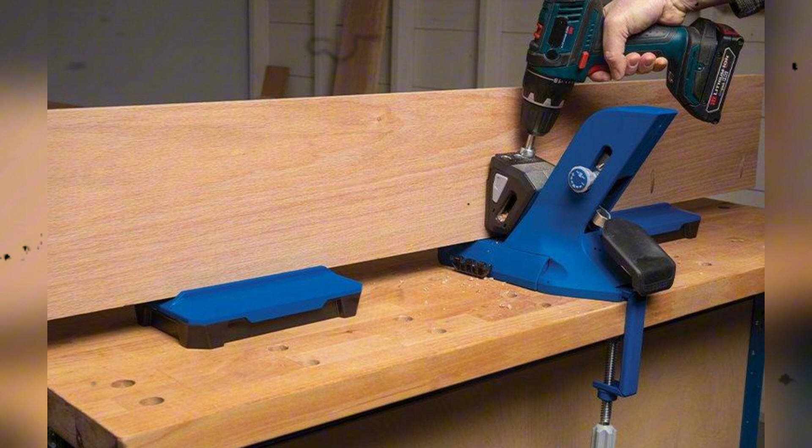But cross back into Canada, and you enter an entirely different mechanical reality. The Robertson screw is everywhere. It is an inescapable, foundational element of the Canadian physical environment. Go into any Canadian Tire hardware aisle, walk into any home hardware store, or visit any local lumber yard from Halifax to Victoria, and the visual evidence is overwhelming. The color-coded system, the green number 1, the red number 2, the black number 3, is instantly recognized by every single person who has ever picked up a tool in this country. It is a shared, unspoken national language.

The Canadian trades never let it go. The electricians refuse to wire a commercial building with anything else. The carpenters refuse to frame a subfloor without it. The cabinet makers, the boat builders, the maintenance workers, and the weekend garage mechanics implicitly understood the value of the friction fit. They understood the perfect torque. They understood that you could load a red-handled driver with a 2-inch steel screw, reach deep into a dark, cramped wall cavity, and drive it blind, perfectly straight, without a single slip. That physical sensation, that absolute mechanical certainty, was far too valuable to surrender to the cheaper, imported crosshead alternatives.

The Canadian enthusiast community, and indeed the entire Canadian public, fiercely protects the Robertson drive not just as a tool, but as a point of distinct cultural pride. It is a quiet, subtle reminder of a time when Canadian engineering successfully defied American industrial dominance. When Canadians watch American home improvement television shows, there is a collective national wince every time an American carpenter is shown pressing their entire body weight against a drill, desperately trying to stop a Phillips bit from camming out and destroying the wood. The Canadian viewer watches, confused, and simply wonders why they do not just use a Robertson.